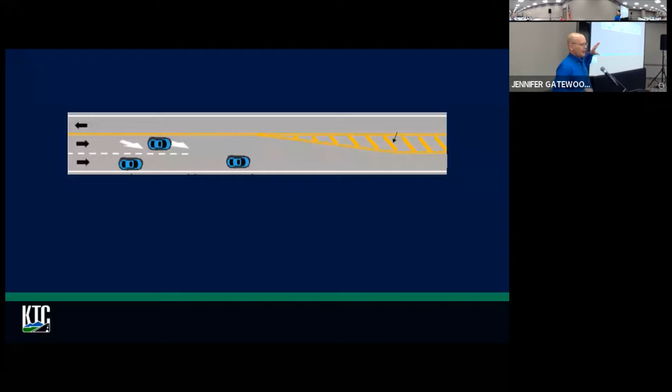But that person probably thinks, well, I got time to check my text until the next message. But no. So where does it fail? How does it start to fail? It starts to fail in what I was describing just a few seconds ago. If you're driving fast and you're overtaking a slower vehicle and you're merging from 2 to 1, now you're starting to run the risk of crashes.

Or if there's so many cars, in this situation that we're showing here, this vehicle has to merge right, correct? Correct. So there has to be enough gap for that person to get in. You ever approached an interstate where it goes from 2 lanes to 1 and everybody kind of slows way down to start zipper merging in between each other, right?

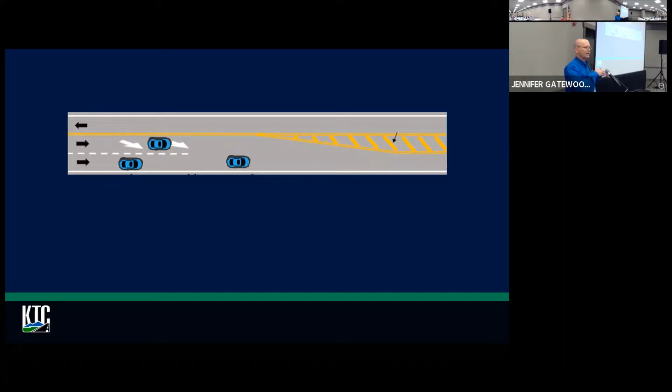If we've got so much volume that people are braking, slowing here at this friction point, you're actually decreasing capacity. It's actually better to just have 2 lanes because, even though people are going slow behind whoever's controlling the queue, this starts to back everybody up when there's a lot of traffic volume. So I'm gonna go back. You can see this 1200 is shown as the max.

Sweden is the leader on this. Believe it or not, they've got like 1,500 miles of 2+1 in Sweden. So they know what they're doing. They've had stuff for 20 years over there. So they've actually had hourly volumes getting closer to the 1,500, but they're starting to see that once they reach that, they are hitting that friction when the cars merge.

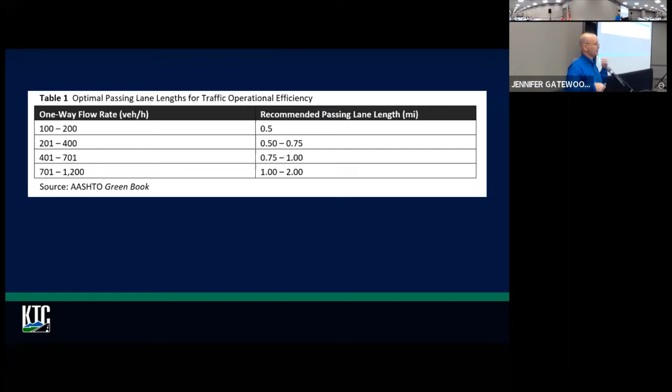And when they know that that's going to happen, sometimes like special events, like a soccer game or something of that nature, they'll actually come and put grabber cones and get rid of the alternate passing lane and just leave them 2 lanes. Even though they have a 3rd lane in the middle, they'll stop it because they'd rather have 2-lane flow than this situation. Okay. So works well, works great until too many cars. There's one other Achilles heel.

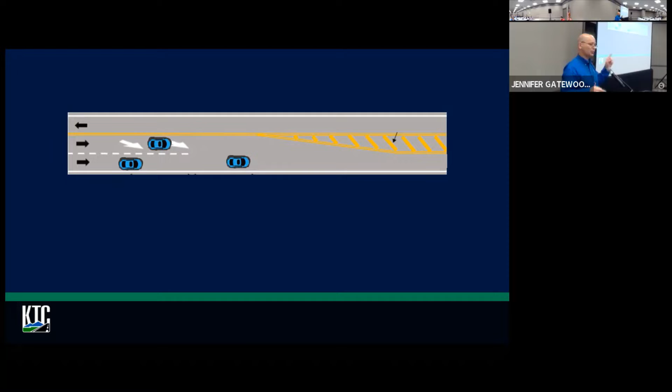But let me get back to the kindergarten. Play fair. I try to teach that to my kids, try to do that for myself. Don't hit people. That's a great kindergarten lesson, and that's directly relatable to what we're talking about. If we just get our drivers not to hit each other, this will be a better world, correct? Much safer. Well, hitting cars, don't hit people, that's the other Achilles heel.

If you're going to have many access points along these corridors, then you're going to have an opportunity. You're going to have different speed differentials, either a car entering into the roadway who's driving slowly and trying to get back up to speed. And of course, we're increasing speeds. These guys will talk about that in a little bit. But you're increasing speeds on the free flow, and a car pulls out. Now there's a speed differential. There may be a crash.

Or if a vehicle needs to turn, there are some tricks that we can do. I'm getting ready to talk about some updated guidance that's going to come out here soon. Got some news on that when we get to it. But what we are showing in the guidance is if you would put in a turn lane on just a regular 2-lane road, then those same justifications apply for a 2+1. So in other words, anywhere you would put a turning lane on a 2-lane road, you should put one on a 2+1.

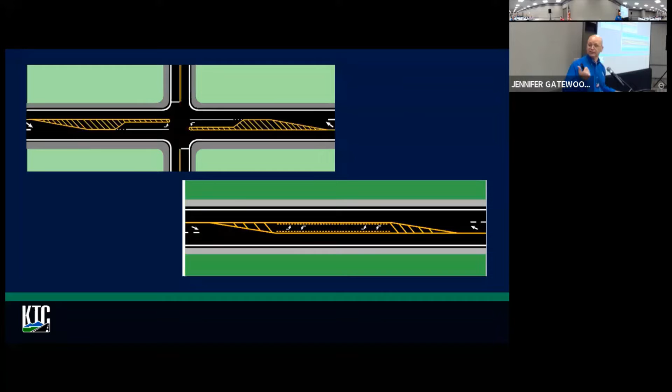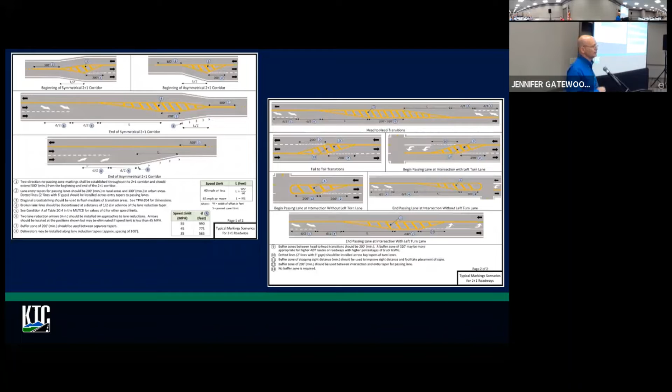So, a couple more kindergarten things. Draw and paint and sing and dance and play and work every day. That's great. And then another lesson, yellow and white are really cool. That's for my traffic operations friends. They love yellow, they love white. But these are actually screenshots of traffic operations' new pavement markings and signs and how they plan to do 2+1s from now on. So that's a big gain right there.

Last kindergarten facts that I have for you here. Be aware of wonder, and then the biggest word of all is look. And so be on the lookout for a joint memorandum from Mr. Layson and Mr. Tharp. Talked to Mr. Tharp this morning. He's ready to move this, and this will come out and launch the new guidance. We've had a lot of learning, and it's been 9 years, 10 years since we've been tracking this. But we feel like we've improved the guidance, especially with these District 4 folks helping us. I know there's one in District 3, District 5 is looking at some, so it's starting to come up and be used more and more.

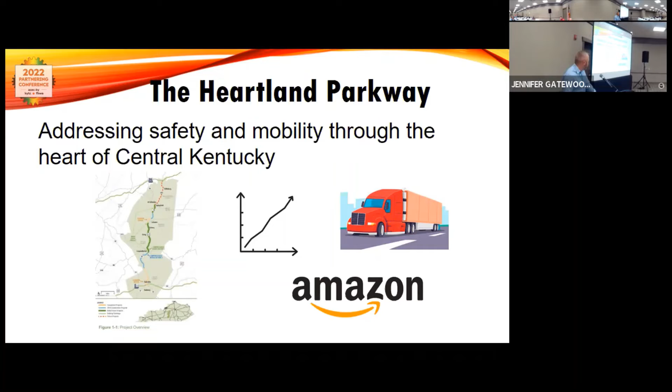So the Heartland Parkway Foundation was formed, local community leaders, county judges, elected officials that lobbied and pushed for a Heartland Parkway concept that you kind of see here. In 2005, there was a planning study completed that looked at a few different options. We'll talk about it in a minute here. But the corridor overall had some sensitive resources on it. It had some historic homes, had a state park, had a Civil War battle site, crossed the outstanding resource water of the Green River, several things like that. So a lot of considerations.

The 2005 planning study looked at 3 different options. Option 1 was a 4-lane divided, fully controlled access facility. Interchanges and all, brand new route from end to end. This is about 70 miles from parkway to parkway. Some of that was existing bypasses, some was proposed additional bypasses around some of the towns there. Option 2 was a 4-lane divided, partially controlled access facility, basically improving the existing Kentucky 555 and Kentucky 55 routes, in addition to bypasses around towns that didn't already have them. And the third option, before they were called 2+1s, was adding passing lanes here and there throughout the corridor, to help move that truck traffic along, things like that.

The 2005 study ultimately recommended option 2, the partially controlled widening of the existing facility. That's how they wanted to move forward. They would build bypasses that weren't already there, widen existing bypasses to 4-lane divided, and have a full 4-lane divided facility from end to end. About 50 miles of that was existing 2-lane corridor. About 20 miles was existing or proposed bypass around the town centers. So the price tag at the time was in the $450 million range from end to end. So obviously a massive undertaking. Obviously required a lot of right of way, a lot of utilities, had a lot of the same concerns you have on any corridor like that. Big, nice, wide right of way, a lot of water lines, a lot of utilities in there that have been put in the last 50, 60 years.

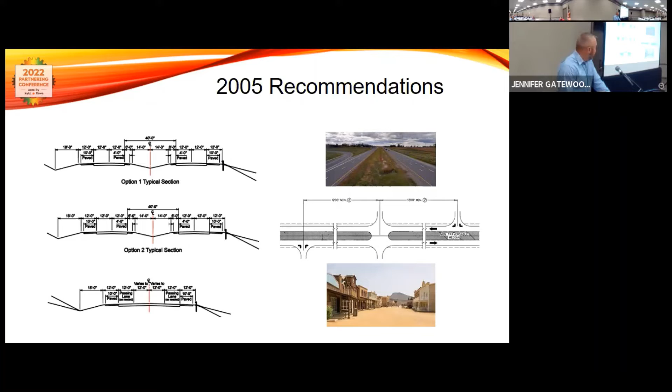That's in District 8. And in 2015, District 8 put out their first section. By the fall of 2015, we had 6 miles of 2+1 open to traffic. That's how quickly it went. Versus a 4-lane divided, we might have had it constructed at this point, with all the right of way, utilities and construction costs that would have been involved. So it certainly moved things forward very quickly.

The local officials, the Heartland Parkway Foundation, saw how quickly it moved. They were very pleased with the result and what it did for traffic and the feedback they got from industry and commercial users. And they pushed and lobbied for additional funds for the rest of the corridor. Chris is going to talk more about the rest of the corridor, what we came up with in District 4, some of the challenges we faced, and some of the specific considerations. Anything else, Chris?

So after the Adair County section was pretty much completed, we started design on our next section that we were going to take over in District 4, which went from the Adair County line in the Columbia community up to Campbellsville's existing 5-lane section. It was roughly 9 miles long. We designed that in-house, took it through final design, and in 2020 we opened that section. Just to give you an idea on cost, it was 8.7 miles and we constructed that for $8.9 million. So compared to 4-lane, definitely a lot of benefit there.

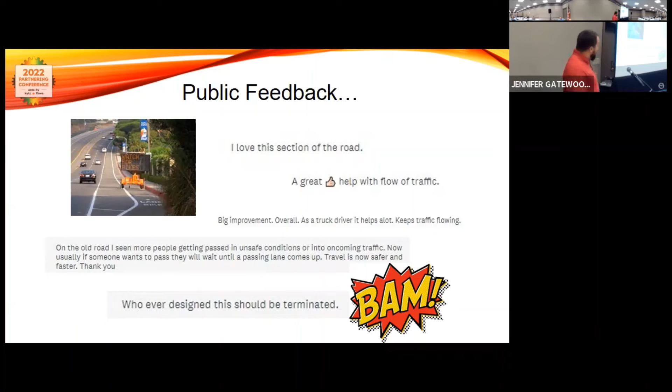So public feedback's always pretty interesting. We did a survey a couple times, put out message boards, trying to get feedback from the public. And right away, we realized that no one else knows how to drive except for the person responding, which is really surprising. Everyone was excellent drivers, but no one else understood how to use this thing at all. There's just a few comments that we had received. I love this section, great flow of traffic, big improvement. Got comments from truck drivers, and then my favorite, whoever designed this should be terminated. I've been trying for 7 years, it hasn't worked. So we're still carrying on.

Just some other questions from the survey. Travel faster through the passing lane section than previous. And so everyone felt like the flow was much better as a whole. And to go along with that, as far as safety, the public as a whole agreed that they felt it was much safer just because of congestion. Prior, you have limited sections to pass and people just take a lot of risk when they are queued up for long distances.

And this is similar to the question that I was referring to. I understand how, but there was a follow-up question at one point: do you think others understand? Absolutely not.

And then there was some concern early on how comfortable people would be in that merge maneuver at the end. There's always a lot of concern there. And overall, no one seemed to really have an issue. I remember, as far as safety wise, the Adair County section, we got a lot of comments on shoulder width. I think it ended up with a 4.5 foot shoulder width, but that was compromised due to a utility impact. And we addressed that in these following sections.

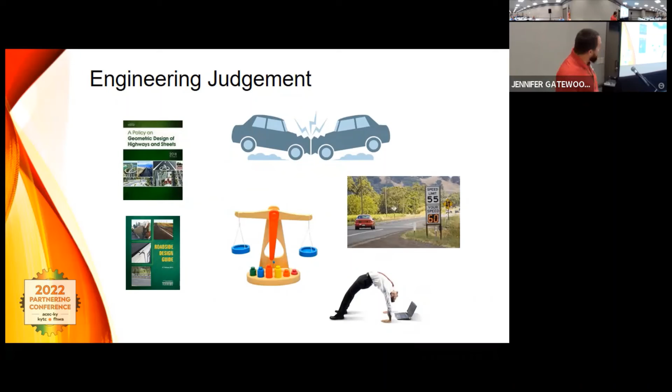We dealt with numerous utilities on these projects, as you'd imagine. Existing 2 lanes, they were in the shoulder everywhere they could get them. So there have been a lot of iterations, a lot of fore slope, back slope iterations to squeeze this in. And as a whole, let's see, I'll get to that in a second.

It took very minimal right of way. Next slide there. So just one example of iterations. And so as time went on, Jeff and the crew there at KYTC did more research on board with us. We came to the conclusion that a flush median would add benefit. There's definitely a safety factor there.

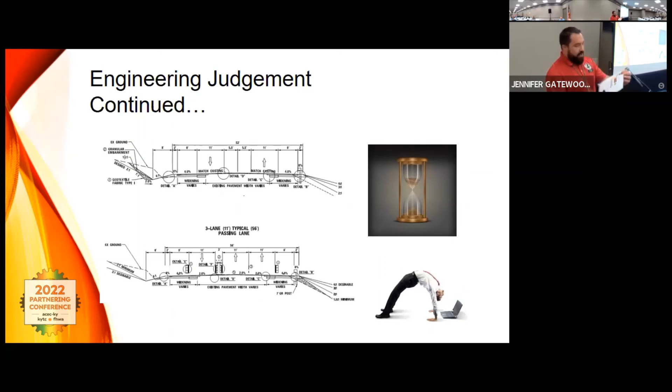We were already putting rumble on all striping, but then on the last 16-mile section that we constructed, we actually put a 3-foot buffer there between the opposing traffic. It can feel a little bit intense with all that movement going on the roadway, and then you're meeting traffic. So mainly for comfort and safety, we've added a 3-foot buffer between opposing lanes here on these recent projects.

So just some things to consider when you're going to approach these projects. You really should be prepared for a lot of political and public pressure to just put left turn lanes everywhere. It doesn't matter if it's a driveway or a Dollar General store or whatever it is. Every person you speak to from the public is gonna ask why not. So what we did early on is set this standard of 10 lefts per hour. Again, that's what we chose based on these volumes, just based on what we were seeing, and went with it. So if it didn't meet the criteria and it didn't fall within a transition area where we could adequately provide one, then we did not provide one.

Some other things here where I have keep out listed, we want to avoid having any of these intersections, even the entrances, anywhere in that taper zone. If it requires shortening or moving this transition area, it's definitely something you want to watch out for, so people's attention isn't solely on trying to merge and then someone sitting there turning in a taper area. So definitely something that we want to avoid.

And in certain situations on these projects, we've had a long section that 2+1 fits perfectly, but then you get into these communities where you have a lot of access, a lot of driveways, whatever it may be. So in those areas, we implemented a TWLTL even through a section that would have been a passing zone. And it's still fulfilling purpose and need. You're still getting mobility there by getting those left turners out of the flow of traffic.

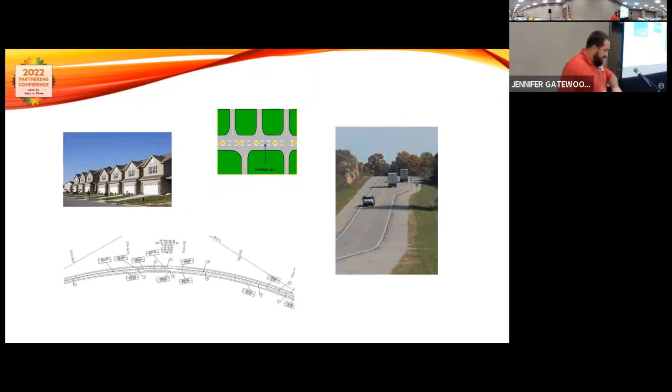We've also used a 4-lane section like here off the striping plans. If a left turn is warranted and it's in the middle of a passing zone, then we widened to a 4-lane section, carried our passing through with opposing traffic single lane, and then added the left. So there is some flexibility. I know in talking to different folks, the mindset is it has to be flip-flop passing, but that's not been our approach. We're still meeting purpose and need by not solely focusing on that.

So on these projects as a whole, we have managed to construct 32 miles of this with 2 acres of right of way acquired. And again, that goes back to the flexibility. They broke my back redesigning this thing over and over and over, but we've made it work, and it's turned out really well. We're really proud in our district for the progress the Parkway's made that, with funding alone, would never have been possible. And just the environmental impacts alone, by reducing this to this size project, that alone expedites the project so much.

So now, we're not done with 2+1s. We just love it. We've got a lot of positive feedback at this point, a lot of public and political momentum gaining from these. The benefits are starting to be there. The congested areas are always the big one. So using various roadway sections to get through particular cases has really helped us get the message across and show that we do care and we're not just blindly placing people in left lanes.

We do have about 16 miles left to complete of the Heartland Parkway. It's on Kentucky 555 in Washington County, and that will finish up this parkway as a whole. We're looking to incorporate some roundabouts in the upcoming section. It's a more congested area, so back to back, we're looking at some roundabouts and how we tie all that together.